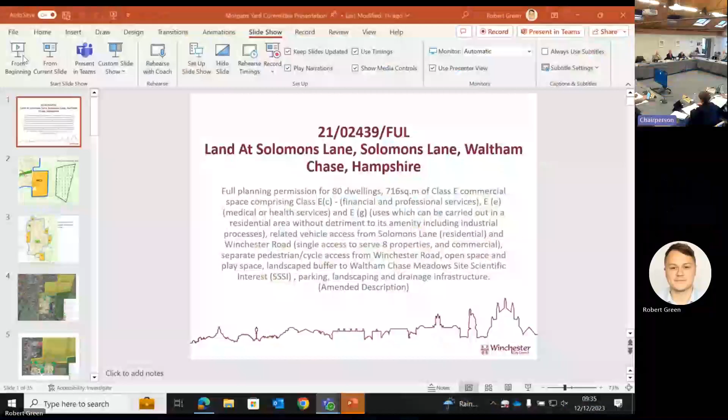Chair, I'd just like to make a comment about item 9, the City Ground Hillier Way, Winchester, Hampshire Stadium. At item 8, I think it's under on the page 19, it says the proposal addressed the environmental concerns linked to the proposed 3G pitch. It may be a case of semantics, but we discussed it and passed the planning application, but we did not fully address that we mitigated the impact of the 3G pitch. It's not been fully addressed. There is still a risk. So I'm just wondering whether the words could be changed appropriately, please.

It's a matter for members as to whether or not the minutes are accurate. You can take a vote on the amendments proposed by Councillor Lee, or if you feel they're a fair and reasonable reflection of the debate, then the vote can be taken on whether or not the minutes are accurate.

I think 'addressed' does cover 'mitigated' as well, because addressed means we discussed all the issues, which we did do. If we as a committee feel that it's correct, then fine. But it does give the impression that...

All right, well, I'll take the minutes separately then. So first of all, are we agreed now with the amendment as read out by Mrs. Hutchins that the minutes of the meeting held on the 18th of October should be agreed? Is that agreed? Thank you.

Okay, and now I want to take a vote on the minutes of the meeting held on the 15th of November. Can I see those in favour of agreeing those, please? And any against? So those are also agreed. Thank you very much, members.

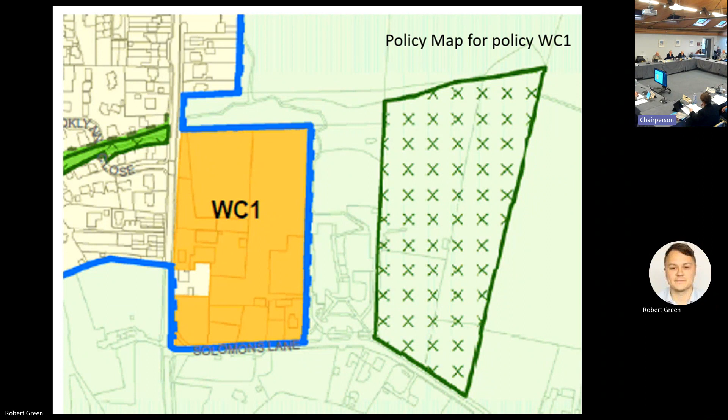To give a wider understanding of the policies for Waltham Chase, this is the policy map for the village. At the bottom, at the point of the cursor, is the WC1 Morgan's Yard application we are considering today. WC2 is at the top, WC3 to the west, and WC4 is split over two sites to the east.

As part of the overall policy considerations within the local plan, the schemes within Waltham Chase were required to make a payment or a donation of land towards the expansion of the primary school within Waltham Chase. The other sites that have been completed and are now occupied have made a monetary contribution to the school and various educational facilities within the area.

WC1 was written to include a donation of land for the school expansion. Unfortunately, the most recent ONS data, confirmed by Hampshire as the Education Authority, has indicated that they can no longer support an expansion to the primary school, and therefore that is not considered as part of this application.

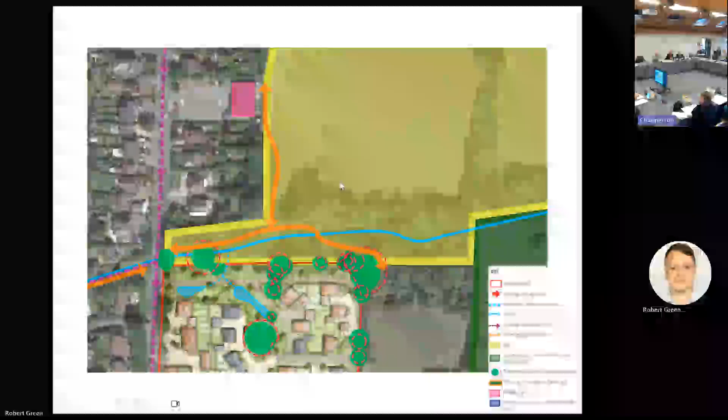The area in yellow is a SSSI, Waltham Chase Meadows. The blue line running across to the north is a stream that runs through the SSSI, and you can see the blue areas within the site here. The attenuation and swales would be linked to this as part of the surface water management. The purple line running down the side is the existing public sewer that runs underneath Winchester Road.

You can see the retained trees highlighted in green. Moving to the south of the site, the red arrows are existing access points, some of which are being retained, as you can see. To the east here in blue, this is the school.

This band highlighted in orange here is a band of TPO trees that are proposed to be removed as part of the development.

As part of the policy, a master plan was required, as the policy covered two areas as shown on the policy map I showed you earlier. It did include the land to the east, WC1A, shown as this green hatched area. However, just to emphasise, this is not part of the red line plan and we are not considering any development within this area today.

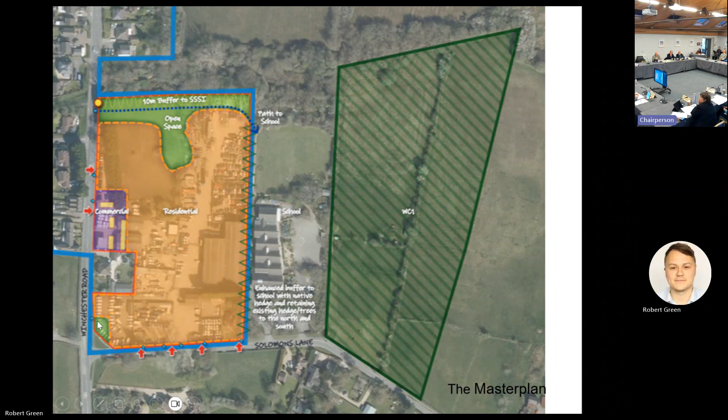So the master plan, as shown on the left-hand side of the screen: the orange areas are residential, the purple and yellow are commercial, and the green areas at the top and on the corner are proposed open space.

And so we move on to the red line plan. As you can see, the primary school is to the east here. Solomon's Lane runs along the south of the application site and Winchester Road runs along the west. There is an existing dwelling on the western side of the application that is not included within this application.

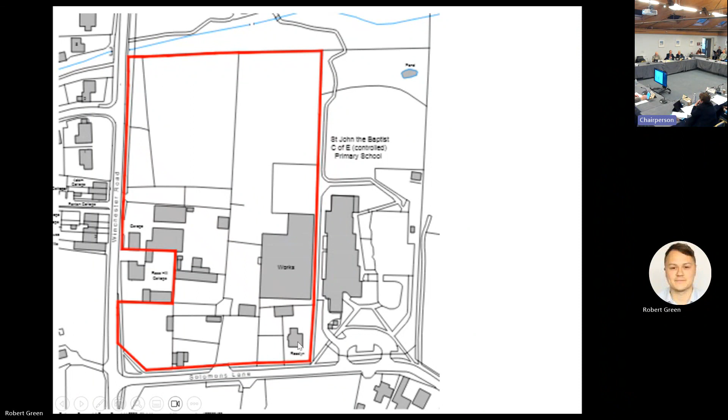This is Rose Hill Cottage. And Rosslyn Cottage is on the corner, southeast corner of the application site. This dwelling is part of the application site and is to be removed and replaced.

So here we have an aerial view of the site. As you can see, there is an existing amount of hard standing with a number of garages on site. There is also a paddock on site that is mostly scrubland at this point.

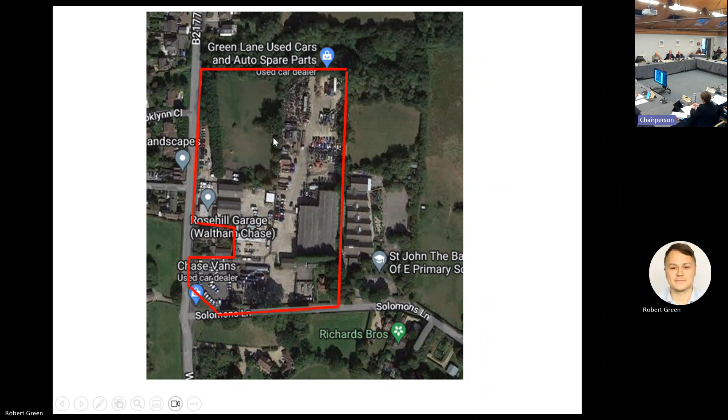It's clear to see, from this side, there is an existing oak tree at the point of the cursor that you can see here. This oak tree is due to be retained and will form the focus for the public open space.

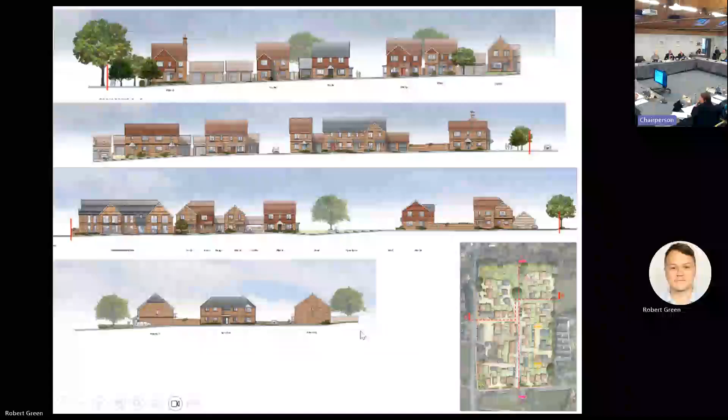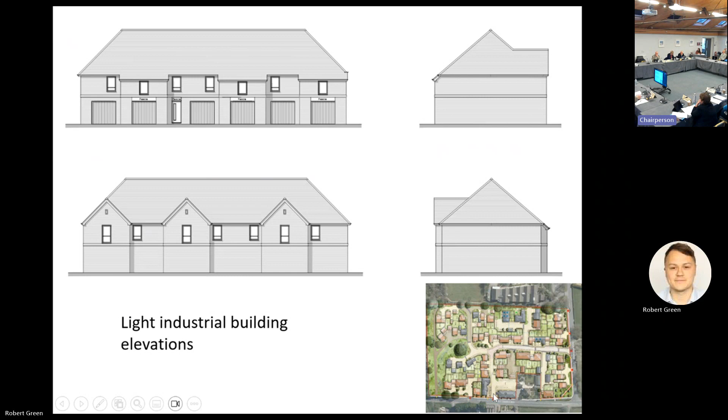The internal elevation would have the workshops on the ground floor and the ancillary spaces on the top floor. The side elevations have been left intentionally blank so that they would prevent overlooking to the neighbouring property that would be retained.

Here we have the flexible employment building that I showed you earlier. The internal elevation is this building here, at the point of the cursor. Natural surveillance would be included.

At the bottom left-hand corner, this is the elevation that would face the road, so there would be an active frontage. The other two elevations have also been left blank with some material detailing to prevent overlooking to various properties around them.

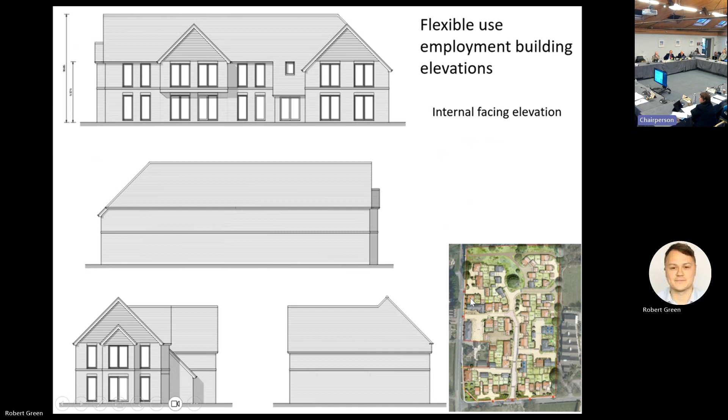Moving on to some visibility splays along the area, these specifically relate to the visibility splays along Solomon's Lane. At the top there is a new access that is proposed, and you can see the visibility lines, which are 2.4 by 45 metres in each direction.

The main access, at the point of the cursor here, is again 2.4 by 45 metres. This is a retained access, so there's very little that would change. It would just be replaced with a more durable surface and some additional planting.

At the point of the cursor, we have the second new access along Solomon's Lane that you can see. And finally, at the bottom, we have the retained access that currently serves Roslin Cottage.

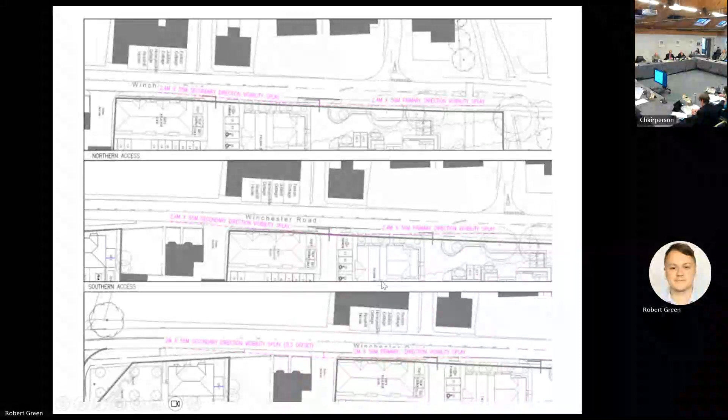Along Winchester Road, these are the visibility splays. At the top we have the proposed access, which would serve the dwellings towards the north of the site.

In the middle, we have the retained access that currently serves the industrial buildings, and this would remain as the employment area access. At the bottom, we have a retained access that would serve a retained cottage outside of the red line plan, and you can see that suitable visibility splays have been achieved.

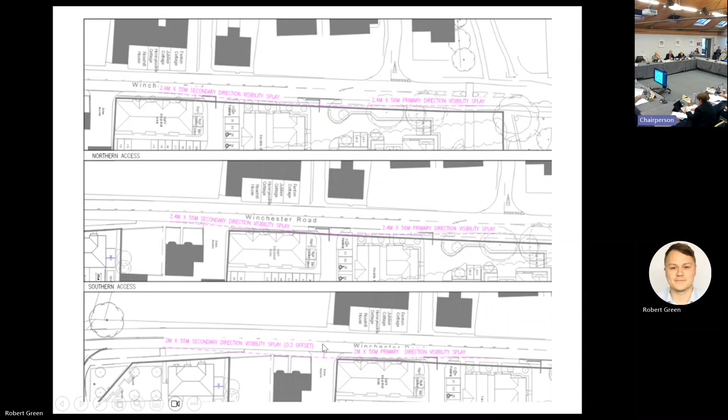Here we have the landscaping plan. It's very detailed, so I'll just highlight some of the areas.

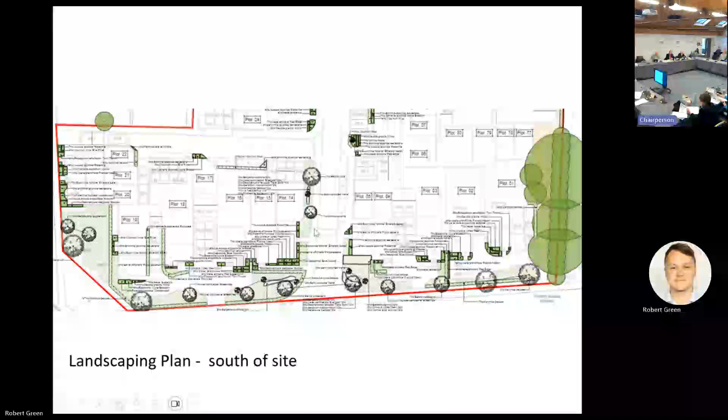This is the south of the site. You have the access into Solomon's Lane here. We have the public open space on the corner, with the idea being significant additional hedge planting fronting the roads to ensure more of a rural feel and a very green space around. All of the planting proposed is to be native species.

Moving on to the north of the site, this is the retained oak tree that we looked at yesterday. Again, we have a number of hedging along the boundaries, specifically the boundary with the school, the boundary with the SSSI to the north, and some planting along the eastern boundary as well, which you can see here.

Within the public open space at the north, there is a 10-metre buffer included to the SSSI, and this has been proposed to be planted. The area closest to the SSSI has the native hedge, followed by a lot of understorey shrub planting, and then some rough turf planting.

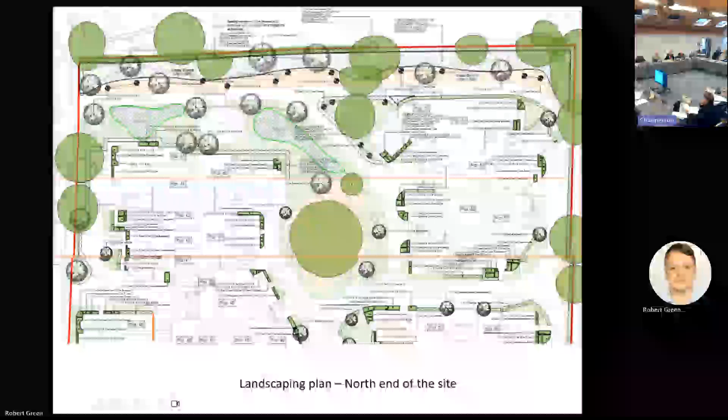On the other side of the open space is more durable planting, and you can see some swales. These are proposed to be a maximum of 1 metre in depth.

This application does include a local area of play. These are generally for Key Stage 1, so smaller children, to let them run around and play. This area is proposed to be enclosed with a hedge.

In this case, the applicant has indicated that they would provide some stimulation for the children to play, so some boulders to climb, some logs to climb, and some variation in land levels, as you can see.

It has been somewhat unclear as to whether or not these have been acceptable, so there is a condition within the recommendations for further details of this local area of play equipment to be agreed.

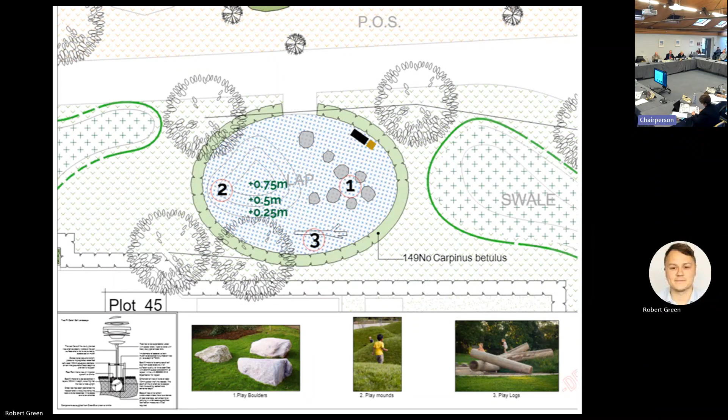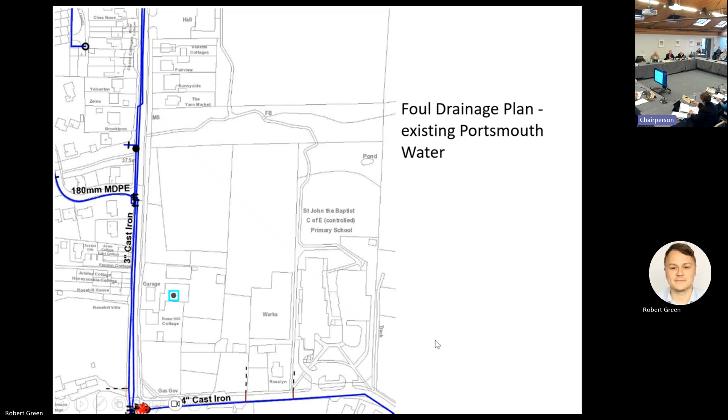Moving on to some drainage, there are two companies that cover Waltham Chase. This blue line is the Portsmouth Water lines, and the pink lines here are the Southern Water lines, which provide the foul drainage.

There has been historically some issues with drainage, specifically within Brooklyn Close, which is on the other side of the road around here. Condition 7, as recommended within the report, requires that the applicant work with Southern Water and submit a phasing plan for occupation, so that any works required by Southern Water to update the system can be taken care of prior to any occupation, and it would not exacerbate the foul water any more than necessary, and can afterwards be updated to accommodate all the additional development within the village.

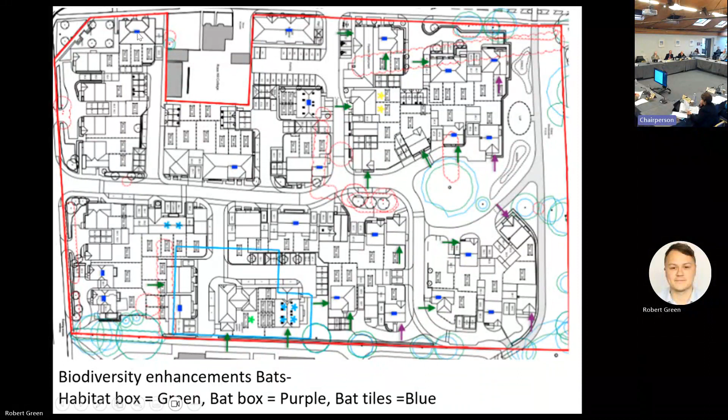Moving on to some biodiversity enhancements. The larger green arrows are habitat boxes. The purple arrows that you can see around the public open space are bat boxes within the dwellings, and scattered around the development there are bat tiles at strategic places.

We also have some specific bird enhancements. As you can see, the different coloured arrows are for specific birds. We have red arrows for swift boxes, orange arrows for sparrow boxes, pink arrows for house martins, and other generic bird boxes are the blue arrows.

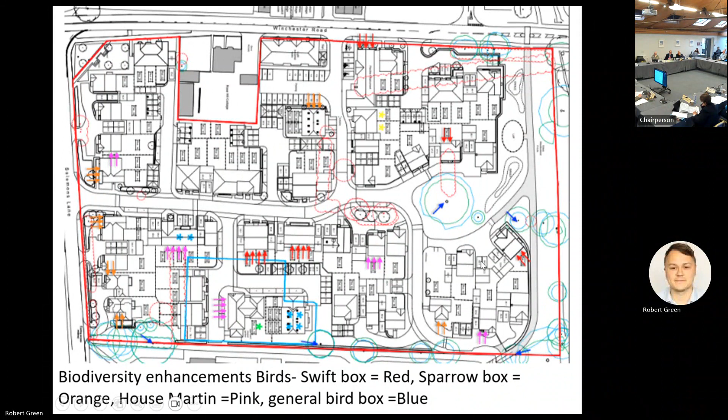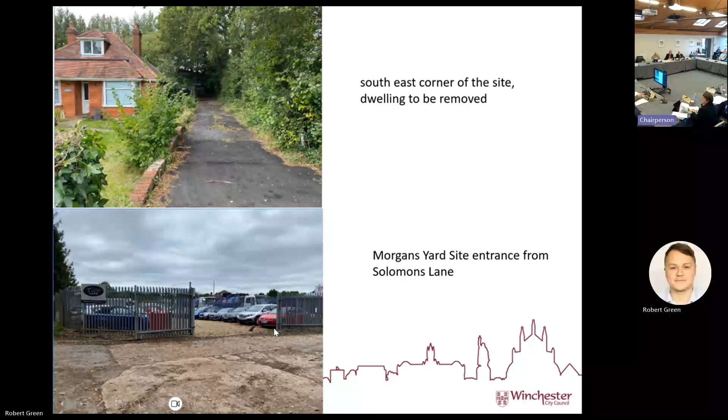At the top, this is the existing access to Roslin Cottage. This would be retained and improved to serve the new dwellings. At the bottom is the existing access into Morgan's Yard. As you can see, there is a lot of hard standing as existing.

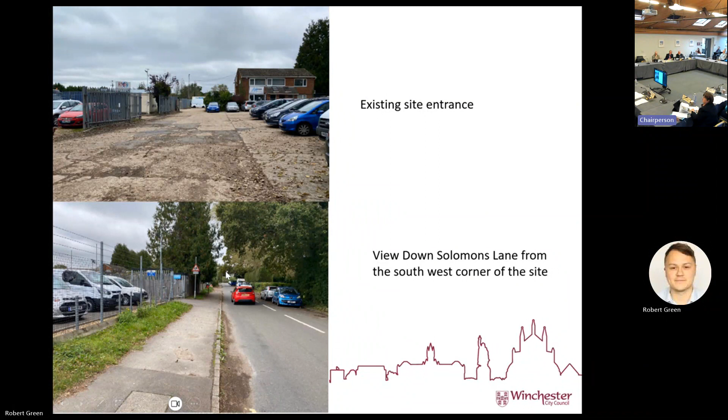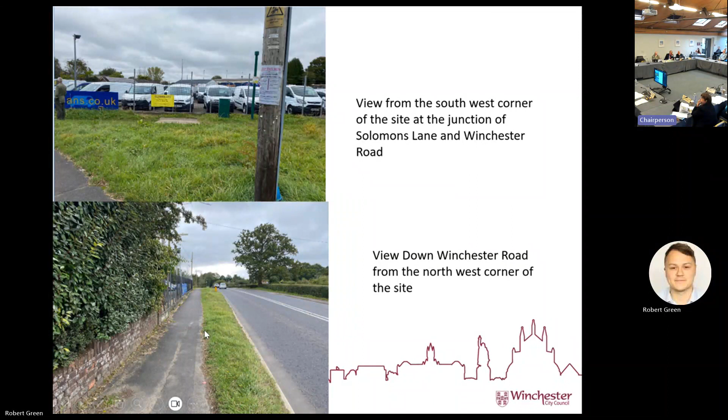At the top, you can see one of the existing office buildings on site and the extent of some of the hard standing. At the bottom, this is the view from the corner looking up Solomon's Lane. From that same corner at the top, this is the view where the public open space would be. At the bottom, we have the view along Winchester Road, and you can appreciate the existing footpaths.

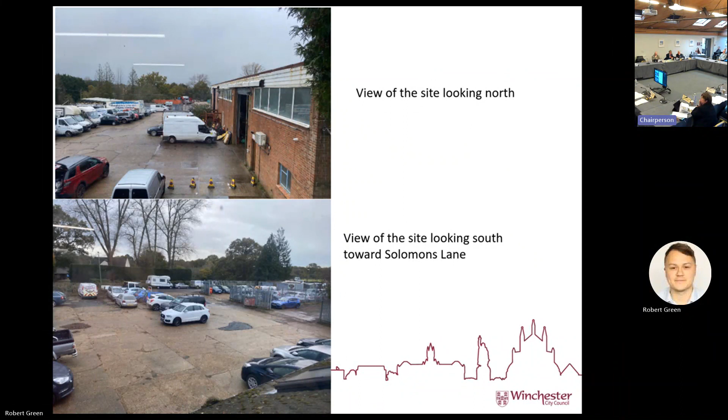These are taken from within the office building, and you can see from across the site, it's a lot of hard standing. This is on the right-hand side, an existing garage building that was for B2 uses. At the bottom, this is the view towards Solomons Lane.

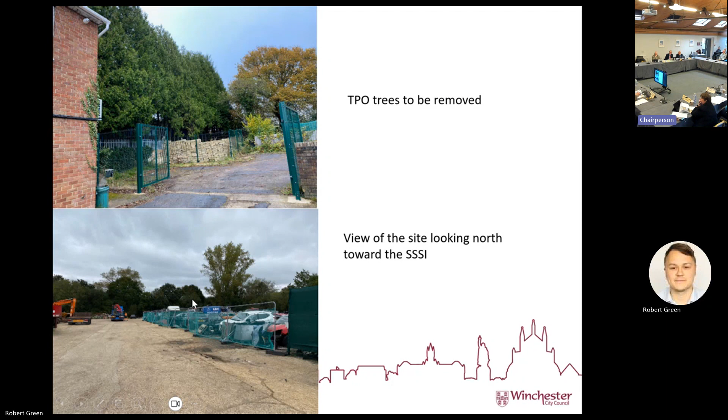To the bottom, you can see more of the hard standing and the Thames Water trunk sewer running along the back of the site here.

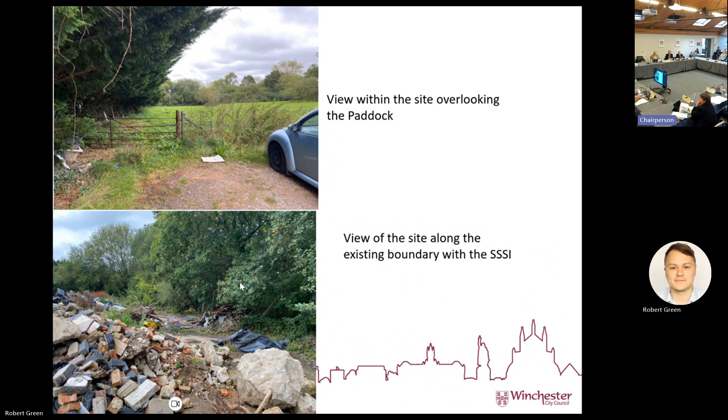At the top, you can see the existing paddock that would be removed. And at the bottom, this is somewhat out of date - it was taken earlier this year. This was the relationship between the trunk sewer, which you can see here, and the site. It has been somewhat updated and cleared out at present.

The recommendation is to approve, Chair.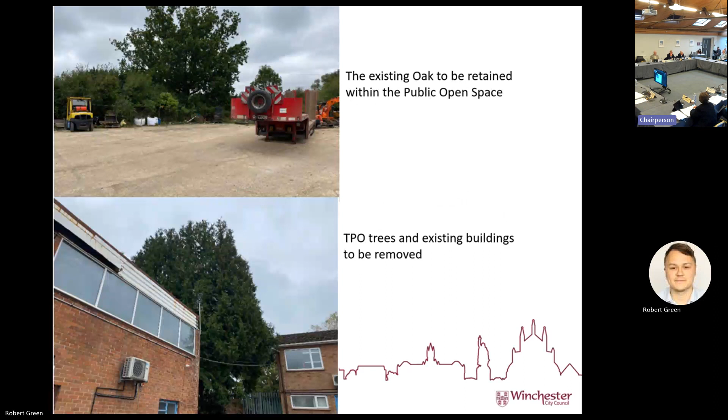My main concern is obviously the sewage flooding in that area. If you notice on their own report, it says most of the northern area is at medium or high risk of flooding. No one's picked that up. That my residents get flooded quite often. Brooklands is one further down the road, which is Bull Lane.

The other main concern is the safety of children walking to school. If they close this new access at the back of what's called the boardwalk, it will make the children walk to school so close to the road, it is untrue. And that is my secondary concern. There's others, but they're the two, sorry.

Thank you very much. I will just say that we did have a site visit yesterday, and members were encouraged to go and have a look at the other sites that you've referred to, which I'm sure most of us did do a drive-by and have a quick look. So thank you very much for raising that with us, and thank you very much for coming along this morning. If you'd like to switch off the mic and return to your seat, thank you very much.

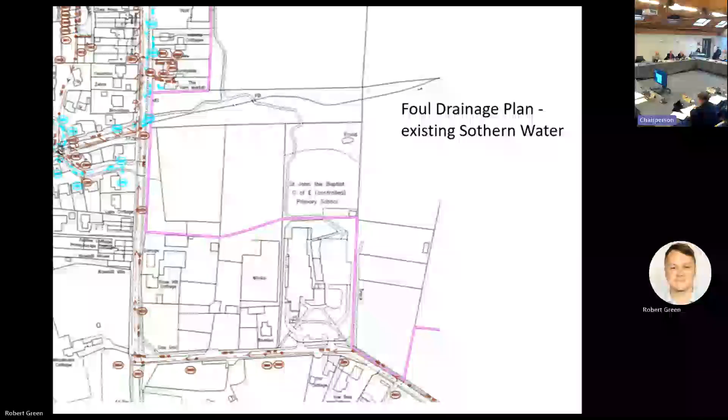Chairman, councillors, thank you for the opportunity to speak on the item. My name is Ian Donoghue, I represent Shedfield Parish Council. Alongside me, Margaret Jones, who would answer any questions that you may have from the parish. I just want to concentrate on 3 main issues.

The requirements of the policy are shown in the officer's report and refer to 2 sites, WC1 and WC1A, for which a master plan is required to demonstrate how the 2 sites will be brought forward. To give some background to the policy, the site was originally earmarked for 65 houses and the allocation to the school for an extension. At the local plan inquiry, the developer offered WC1A for community recreation land. On this basis, the allocation was up to 100.

However, as indicated in the officer's report, the applicant Clean Slate does not own WC1A and therefore cannot deliver the community recreation land. The upshot is we now have a scheme of 80 houses with no land available for the parish. Not that the parish need the land, the offered contribution will not provide for this. On behalf of the parish, I did speak to the developer about the provision of alternative land to WC1A, but they were unable to provide any.

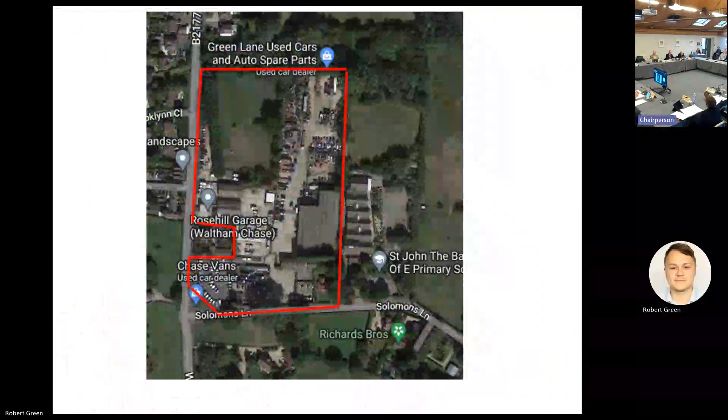Thank you, Councillor Wallace. Members, do we have questions of clarification for the local councillor? No, I think you were extremely clear. Thank you very much, Councillor Wallace.

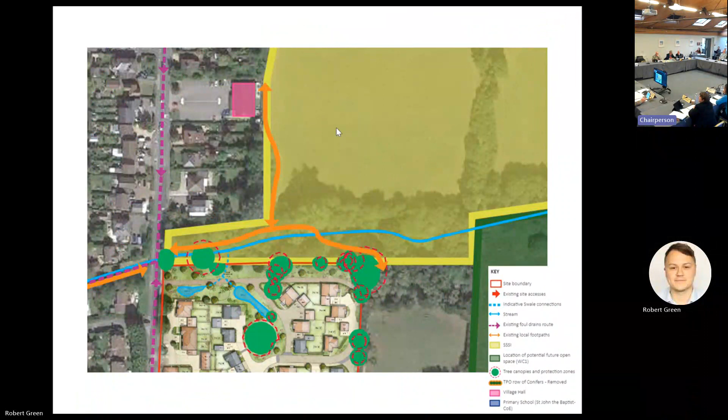So as part of the routes to school, there is a footpath that runs through the public open space, through the SSSI - excuse me, let me just bring it up. So it's this orange route here that's highlighted. This runs through third-party land, which I understand is owned by DEFRA. And because it runs through the SSSI, it's highly sensitive and there's no guarantee that it will remain open indefinitely.

It is outside of the confines of this application. So by introducing an additional footpath from Winchester Road to the school as part of the policy, it would not override the use of that footpath as long as DEFRA are happy to carry on offering its use. The footpath within the public open space is to comply with the policy and give more options if and when DEFRA decide that they no longer wish to provide a footpath through the SSSI.

Thank you, Chair. Councillor Gordon-Smith. Well, actually, my question has just been covered by the last one, but thank you.

Councillor Lee. Yeah, sorry, Rose, I should have thanked you yesterday for your visit and for the report in front of us. We picked up on this yesterday, and I appreciate biodiversity net gain regulations, if you like, are not coming in until January. So what we've got in front of us is a positive gain, which is fantastic.

But there were some questions from the Hampshire County Council ecologist, which suggested that the report in front of us, or certainly posted to the portal, was incomplete. I wonder if you can comment on that and whether that's going to be completed. So that's my first question.

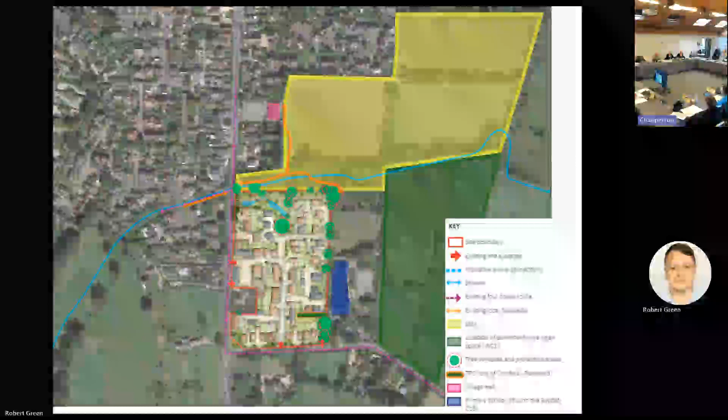Thank you, Councillor Lee. Although there is quite a lot in the report about viability and the reasoning for the reduction in the percentage of affordable housing. Mrs. Chapman: So in regard to the 250 dwellings, the local plan has allocated approximately 250 dwellings, which is shown in this plan here. So over the 4 policy areas, WC1, 2, 3 and 4, that would have provided approximately 250 dwellings.

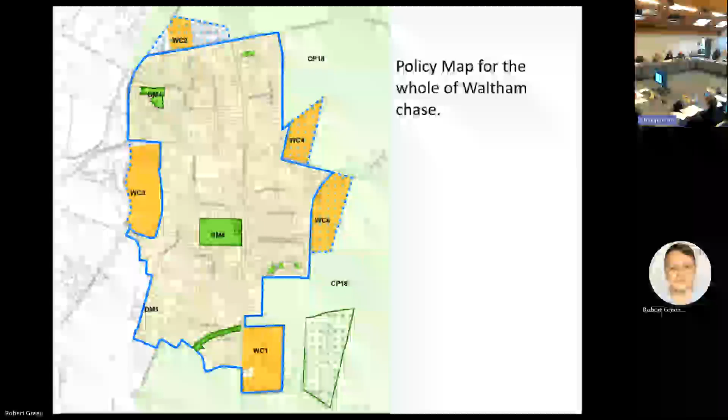As you're aware, we usually agree sort of 10% above or below, and that was allocated within the local plan. What we cannot allocate is windfall applications, which I understand the parish council have included in their counting. So while I understand that the overall plan says approximately 250, that is in relation specifically to the allocations from the local plan. It doesn't take into consideration any additional windfall applications, which the parish council have done. So in general, there would be a general uplift, and they all contribute to our 5-year land supply in general.

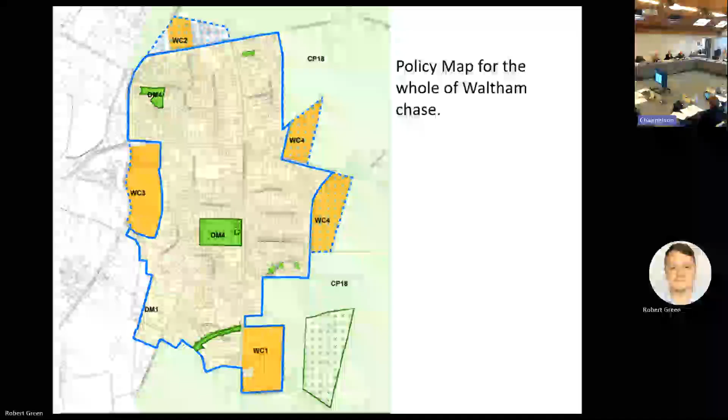And then in regard to the affordable housing and the viability, a number of viability appraisal reports have been submitted, and they clearly lay out all the various considerations. I think it highlights that the planning practice guidance does allow for approximately 15 to 20% developer profit as standard for applications. In this case, the developer is taking less than that so that he can provide additional on-site benefits such as more open space, a lesser amount of dwellings and some affordable housing.

I understand that 10% is significantly less than what we would usually ask for, but I think in this case the viability has shown that 10% is rather generous in this case.

Very good. Thank you very much, Rose. Difficult report to go through, complicated, so thank you for all that.

Okay, I think oh, Councillor Reid, I beg your pardon. That's okay, your last question, thank you.

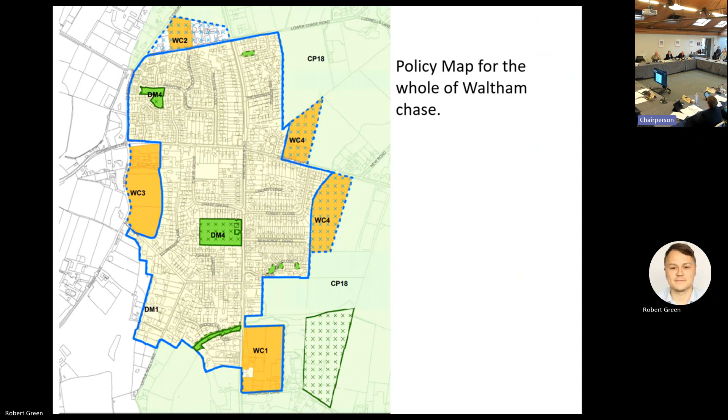Chairman, one of the questions asked at the site meeting, which I just remembered, was regarding the commercial building being moved from the original scheme forward to the edge of the road. We were told that we would be shown plans of the planting in that area, which included, I think, some trees were mentioned. It doesn't look a great deal of room. Can I just see that plan?

Thank you. So this plan probably shows it the best. It's this middle street scene here. So there is some planting along the front with some trees shown as well. Can we know the space that is actually planted in?

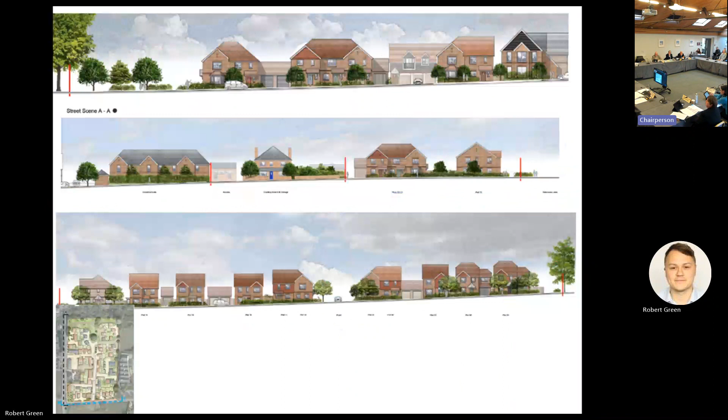So the building itself tapers. You can see it at the point of the cursor here. It tapers slightly to allow for visibility splays. When zoomed in, it's approximately 0.5 metre. So it is a limited space, but there is still sufficient space for some planting. Proper trees won't grow in that type of confined space. They're more likely to be a native species hedge.

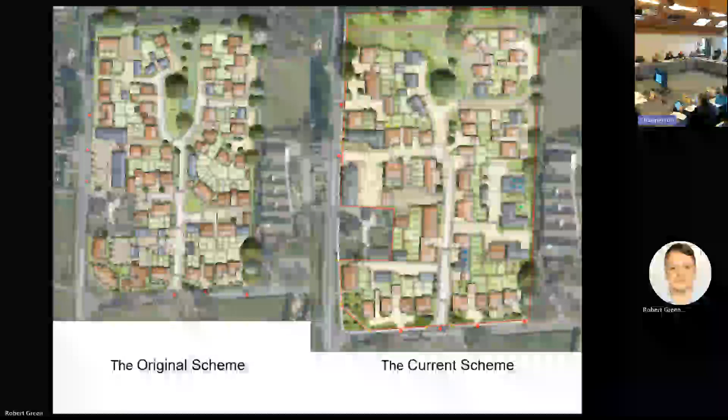So if some of the species within the hedge can go up, then it would allow them to do that. But then we would also want it in line with the visibility splays to maintain any visibility, so it wouldn't be higher than I think 0.6 meters is required by highways. That's right, because anyone emerging from the existing property could have a difficult job seeing to the right because of the corner of that structure, as well as the hedge. And there's only a very narrow footway at that point on that location.

Thank you, Chair. Thank you for raising that, Councillor Reid. I think we've now moved to starting debate. So members, debate.

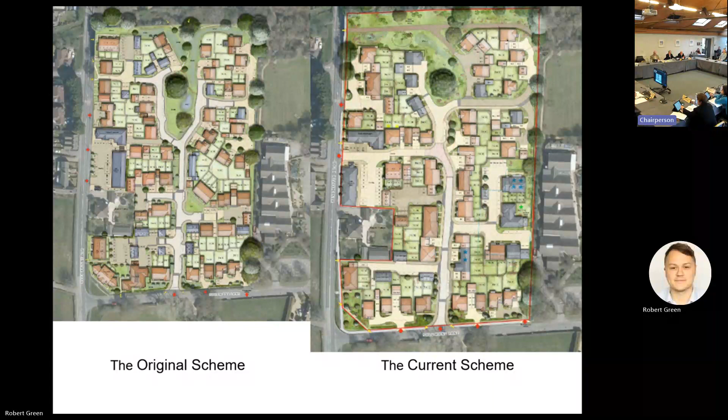Councillor Lee asked when we can discuss the conditions, wanting an extra condition about electric charging points. I've made a note of that, and when we get to the resolution at the end we can look at that to be included in the vote. It would simply say a plan to be submitted to and approved by the local planning authority, showing parking spaces that will be serviced by electric vehicle charging points. Members, do we wish to agree to include that new condition? Agreed? Yeah, agreed.

Thank you. At the same time, look at a fixed crossing point close to where the new footpath for the children is going to be on the highways.

Chair, I think the thing to say is in the heads of terms there's an awful lot we've got to liaise with the county council about. Rose has already done that, and they have got some limitations on some of the suggestions in terms of installing improvements, as there's a big cost involved and it has to be fully justified. But there's certainly more opportunity looking at Section 278 agreements, which is where they're going to have to agree the link of the new footpath, how it links onto the road and the footway there, and how that's safe. There will be further conversations where we can try to influence them, but we do have to look carefully at their standards and the costs of those things.

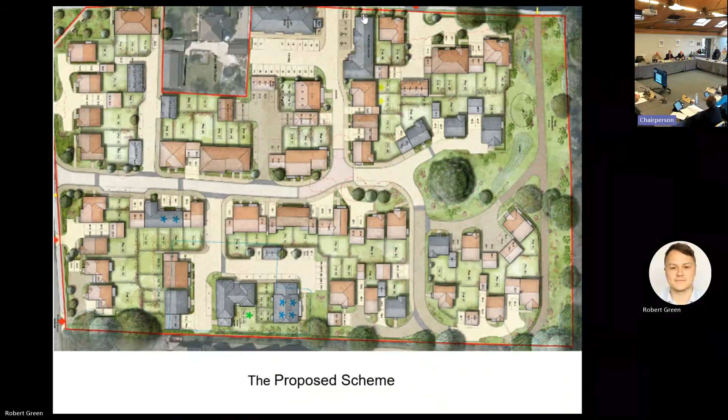There's diesel tanks, oil tanks, and petrol and what have you underneath. Obviously these add a huge cost to the development, which is why developers tend to go for greenfield sites. But I think at the same time, you cannot get the same amount of demand as much as one might from a developer on a greenfield site if they're on a brownfield site, i.e. affordable homes and the rest of it.

I think the issue with viability is always quite a difficult one, because you tend to feel that perhaps a certain amount of wool is being pulled over the eyes. However, there was a report from a QS saying that he'd gone through the costs of sorting out the pollution, and he reckoned they were valid. So I think we have to take that as a given and accept that you're not going to get the same level of affordable homes.

I think the architecture on the site is not particularly inspiring, but it's not hugely worse than lots of other sites, I'm afraid to say. I think one has to be very careful not to judge the quality of sites on the density, because having low density doesn't necessarily make for a very good site. There are lots of things that work against it, like walking to school, access and so on. And some of the most expensive properties in the county are very densely built up.

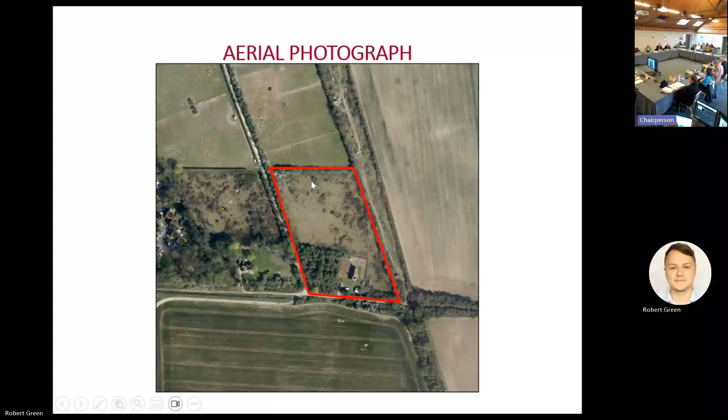To the left, so to the west, you'll see the settlement boundary of South Wonston. To the south is the Lower Road, Oxdrove public right-of-way. Here we have the aerial photograph. The bungalow at the bottom is not part of the site. The red line goes around the curtilage of this bungalow, but this just gives an idea of the site as it was before being developed.

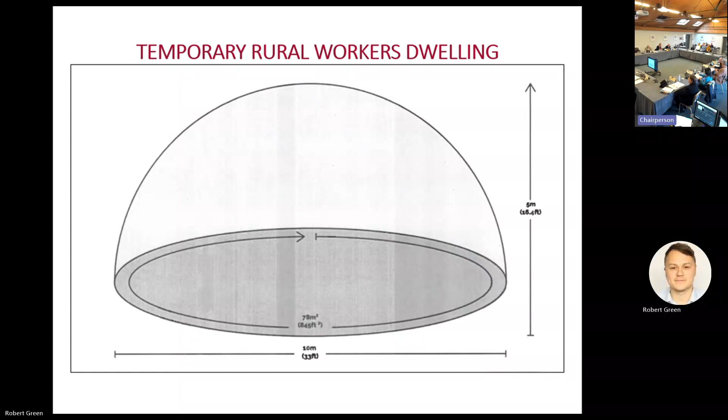Here is the plan showing the temporary rural workers dwelling. It's a dome shape, and this shows the circumference. This shows the interior. The top image shows the ground floor layout; the semicircular area is the mezzanine. At the bottom, you'll see in profile the mezzanine and the steps that lead up to that, used for sleeping.

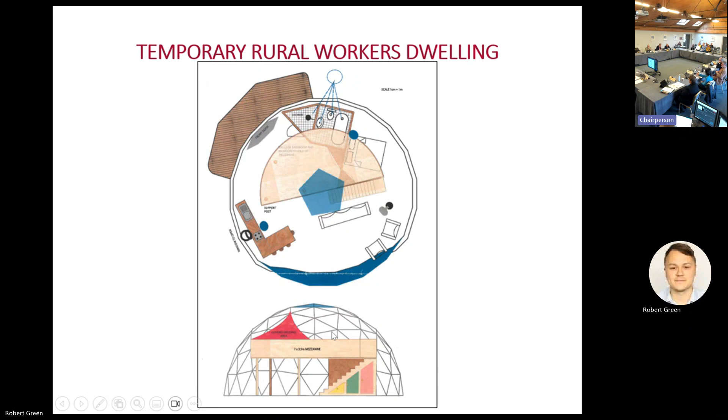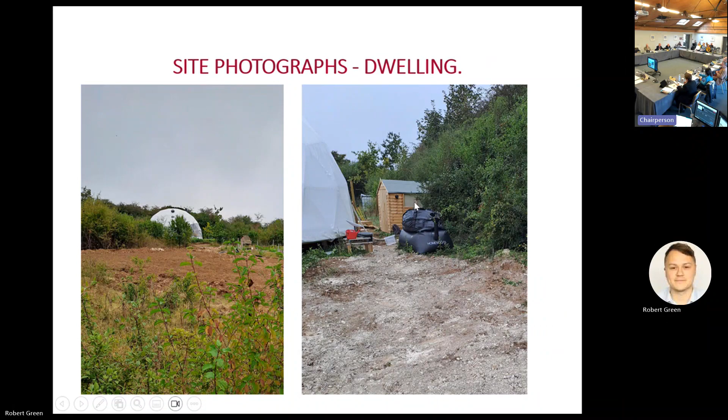Here we have some photographs of the site. On the left-hand side, in amongst the bushes and trees, is the dwelling already on site. On the right-hand side of that photo you've got the side of the dwelling, and then a shed. Then the main gate into the site and the parking area. The white structure is the mushroom growing facility.

And that ends the presentation. Thank you, Chair. The recommendation is to refuse, based upon the reasons for refusal as given in the officer's report. Thank you, Chair. Thank you very much.

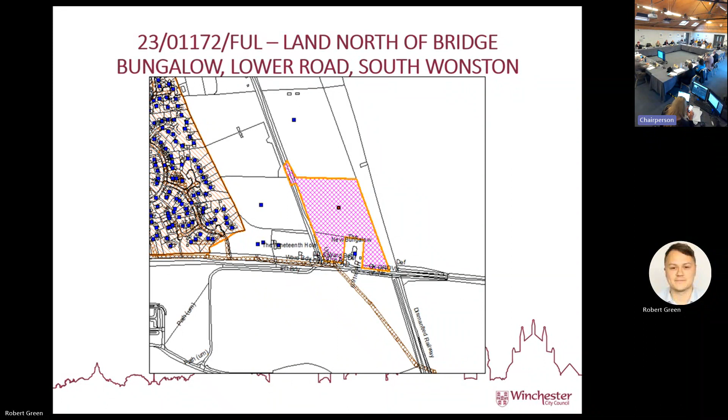Thank you for the question. I didn't want to be personal because I know personal situations are not to account, but in honour and honesty, I lost my job coming out of the COVID pandemic. We also had a house that we owned - it got flooded, it got dry rot, which wasn't covered by insurance. There's no better way to eat through your savings when you're trying to rent somewhere, you own somewhere, your tenants move out, and the bank puts your interest rate up by 3-fold. So we had to sell the house for a song, and we don't have enough money to buy a new house. We don't have the financial records to get a mortgage or to rent. So we had to make that decision to move onto the land.

But that aside, that is not the reason we are living there. We are living there because there's an essential need. We've seen a gap in the market of the mushroom enterprise, and we think we can make it successful.

But you haven't explained why - I understand your personal circumstances and you have my huge sympathy - what is the actual business reason that you have to live on site, that you can't live somewhere else and go to your place of work as most people do?

Regarding the essential need - as Graham mentioned, mushroom farming is a very intensive business. We're making functional mushroom tinctures, this is our first product. There are processes involved with that, with extraction equipment to draw out the beneficial compounds. This extraction equipment often has to be dealt with at all hours of the day, 24 hours a day, sometimes late at night. Mushroom cropping is year round. As Graham mentioned, the difference between a few hours can be a spoiled and a prime mushroom. Also, if there is what's called a spore drop - as mushrooms reach maturity, they release spores - if those spores are released in our growing environment, the whole crop is spoiled. The whole thing needs to be pulled out and deep cleaned. So there is an essential need with the processes we are operating to live there.

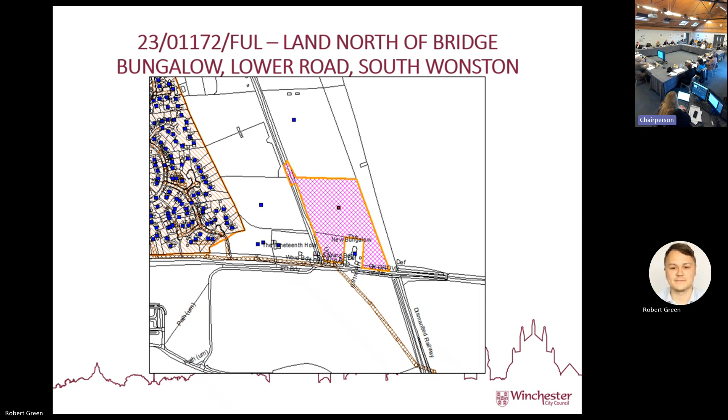That only works in certain temperatures, so we have installed a septic tank. The septic tank has a drainage field, and it sits above the water table. So there is zero risk of any nitrogen or phosphate runoff.

Right, thank you. And in terms of the employment on site, can you just say something about the numbers? Is it just the team here, or is it bigger than this?

We're very embryonic. I have behind me my business partner Chris on the mushroom enterprise. Holly and I launched the forest school together. Graham is our horticultural advisor, friend, and volunteer. We have a volunteer program. We are very embryonic in our business.

In year one with our forest school, we turned over £17,000, but we are very embryonic. As the letter, which was submitted to the report, suggested, Bristol Fungarium, after 3 years, employed 9 people. So there is definitely a chance to employ people. My background is working with impact investing in social enterprises, and I would have a tendency to employ people that are less likely to be employed as well. Thank you.

Councillor Edwards: Thank you, Chair. I'd like to come back to the school, if we may. You've given a rich description of what it's like, but how about some numbers? How many children come each week? How many might be on site at the same time, and how do they get there?

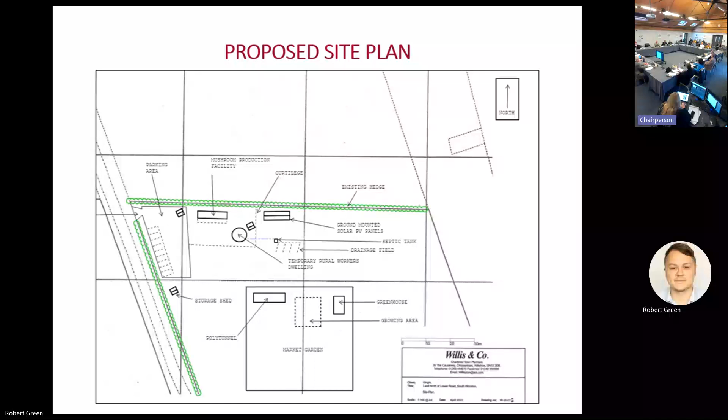Hope that addresses your question. Can I just add, it's important to make a differentiation. It's called a forest school - we call it a forest school. This is not a school. I just wanted to make that point.

Yeah, no, I appreciate that, and actually before the session today, I looked up the Forest School Association website, which I think you're not associated with, so that was a bit of background, and I can see you're doing something small scale.

Can I just ask you a question, then please add to it. So you've told me maximum 12 children on the site at any one time, but I guess you must have a record of how many people come. Yeah, and so we go through a booking system. So on an average week, or however you want to give the figures, how many kids are going?

So on an average week, let's discount winter when numbers drop. Obviously you'd have a stay and play session for a maximum of 15 people - it might be 8, it might be 15 - and then on a forest school session you would have 12. So that's 27 children a week plus their caregivers, so you could double that to 54 each week. We do occasionally have birthday parties as well. The typical birthday party package we offer is for 12 children - some people have more, I think the most we've ever had is 25 children. Does that help?

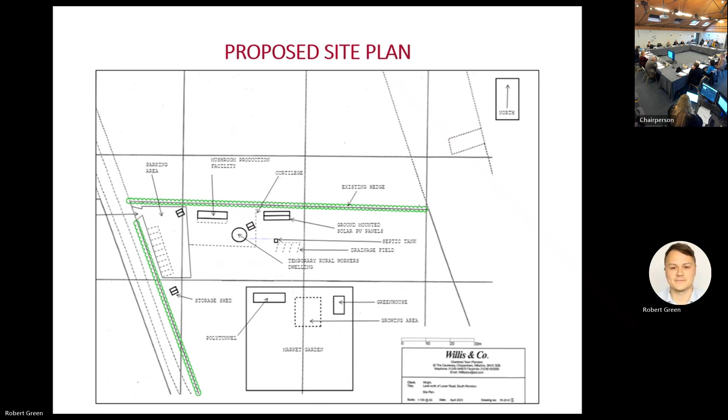So there's two things there. That helps. And now we move to debate, members. Councillor Cunningham.

Thank you, Chair. Firstly, I have great sympathy for the applicant's personal circumstances and the forest school and mushroom production business. However, this development is contrary to a whole raft of the Council's planning policies. In fact, I've counted 10 planning policy contraventions and 2 regulation contraventions relating to soil and nutrient protection without mitigation. Quite simply, it is an inappropriate and unjustified development in the countryside. This business is in the wrong place for this particular application, and I will be voting with the officer's recommendation to refuse permission.

Anybody else? Councillor Gordon-Smith? I rather agree with Councillor Cunningham that the big problem is a dwelling appearing in the countryside. And I was very charmed by what you said, and I've never heard fairies brought up as a topic in a planning meeting before. But I think I have to agree with the officer's recommendation.

Councillor Lee? Yes, the disconnect between people and nature is manifest, absolutely. I mean, the State of Nature report recently indicating the constant decline of nature is significant. And connecting people with nature is a must. So I'm fully on board with that, and I think it's laudable what you're doing. Unfortunately, I think there are planning issues here which are fighting against your aspirations. And so although I'd like to support you, I feel as currently constituted, it's going to be very difficult for me to do that. Thank you.

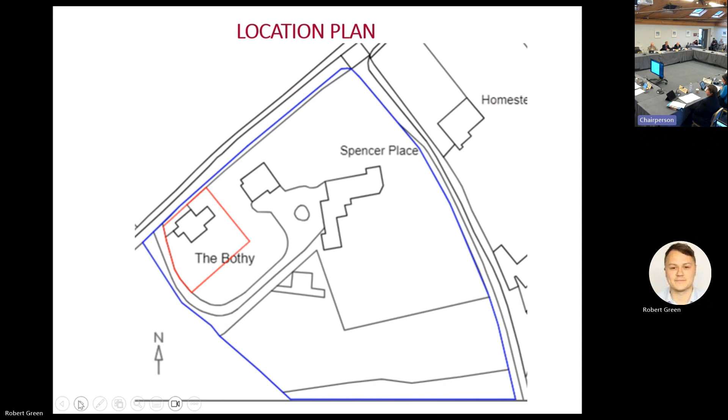This next slide shows an aerial view looking towards the site. The yellow star marks the approximate location of the outbuilding. Spencer Place is just immediately to the right, the L-shaped building. The red line indicates the location of the adjacent public right-of-way, about 70 odd metres to the east of the site. The site is not adjoined by any other residential properties, although one lies immediately to the east of the right-of-way beyond Spencer Place. The site lies in open countryside, approximately 350 metres west of the nearest settlement at Waltham Chase.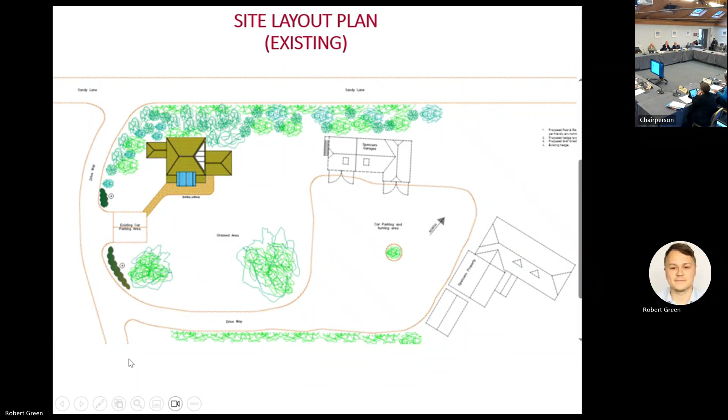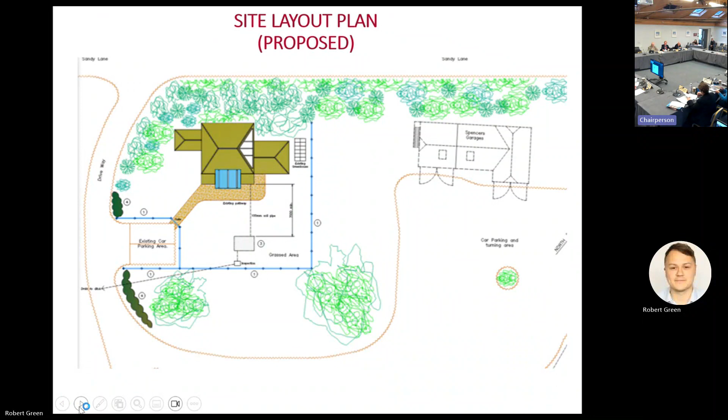The fence is the crucial part, as far as I'm concerned, on this particular application, because if it is going to be fenced, then the design of that fence is crucial. And I think when you look at the photographs from page 206 through to the end, what is very apparent is the openness. Now, once you start to close off a segment of that, it will alter the whole process. I think the fencing would be detrimental to the setting of the listed structure, in my view.

I'm afraid I'm not going to go along with the officer's recommendation on this one, because I understand from the parish council's point of view, it looks very much like it's going to become eventually a standalone building, which could be, does require planning permission, yes, I agree. But the fact that the building's already on site, it will already be fenced, it will look and act as though it's an individual structure. I think it's detrimental to the character of the surroundings.

Thank you. I do understand that it is possible to omit the fence from our permission. So if that's the case...

Chair, just to summarise, you can have two choices. You can omit that fence. It's shown on an approved plan, but we can add a condition that says notwithstanding the details on the approved plan, that fence indicated is not hereby permitted, and full details can be submitted to the local planning authority in terms of its height, its siting. We can do those different things. And also I could recommend also removing permitted development rights for any new operations such as fencing.